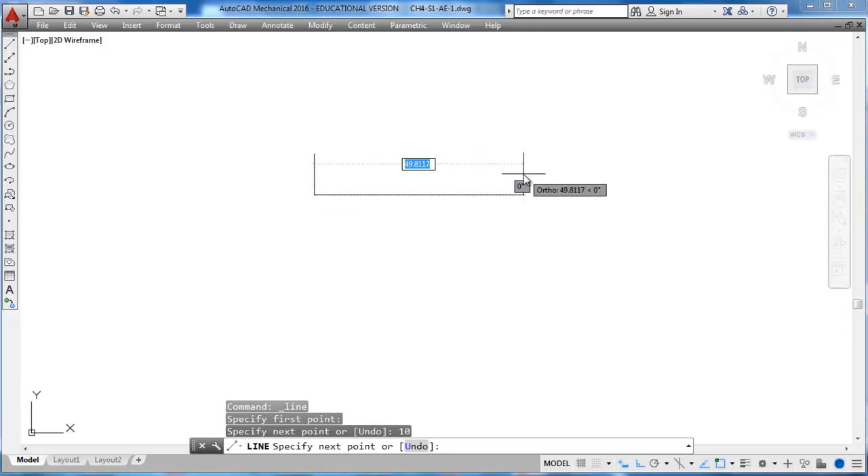So we'll start with line. Draw a rectangle of 10. Enter. 10 by 50. So that is the base.

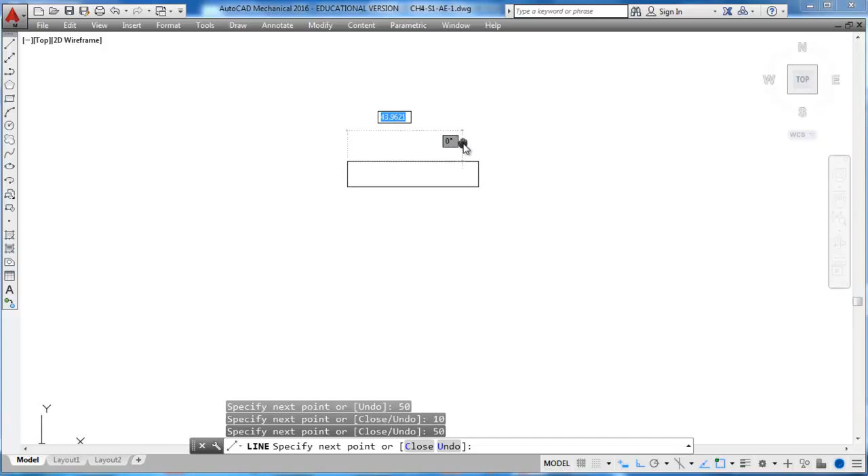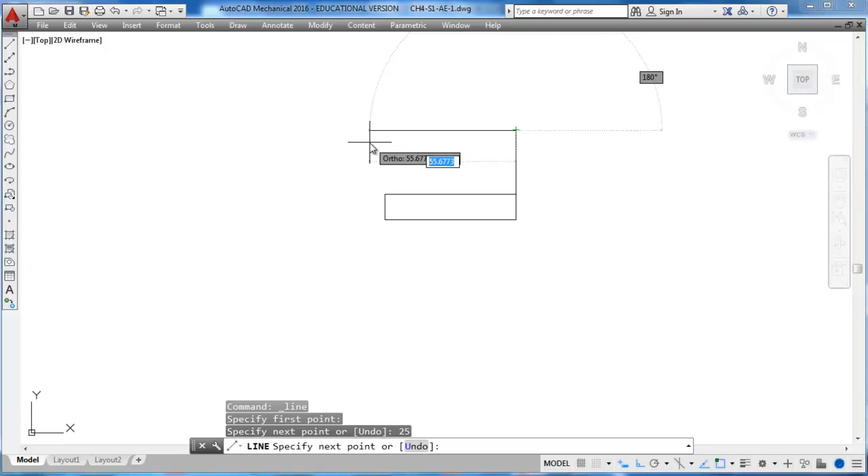Then above that we have to draw the rectangle of 25 by 75. By 75, 25 and to the end of this line. So that is the rectangle.

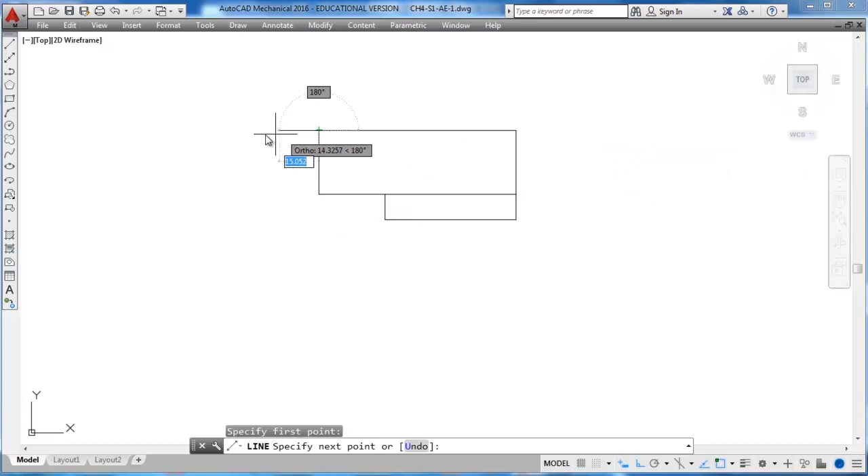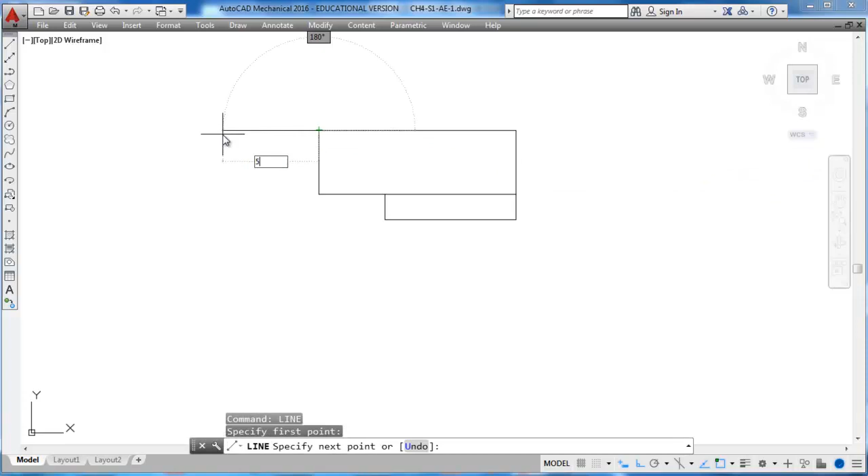Next we have to draw another rectangle of 25 by 50. 50, 25 and close it. So that's it. And here

there are two vertical edges here, one vertical edge here and another vertical edge here at this corner. They are at a distance of 50 minus 37, that is 13 millimeters from this end, and they are not visible. So we have to draw a vertical line which is hidden.

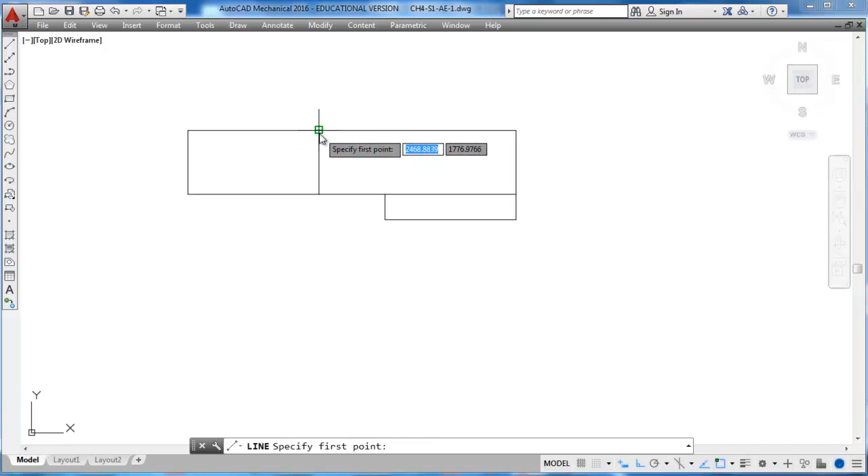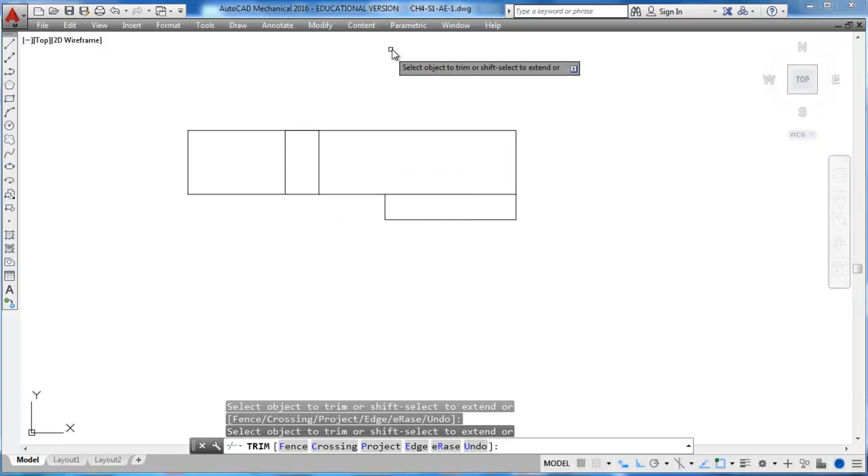So line from here 13 millimeters to the left, and then a vertical line, trim this portion, and this line must be a hidden line. So a hidden line. So that completes the front view.

Now we have to draw the top view. In the top view, we'll be able to see this top surface completely as one surface, and adjacent to that we'll be able to see the base, top surface of the base, half on this side and half on this side.

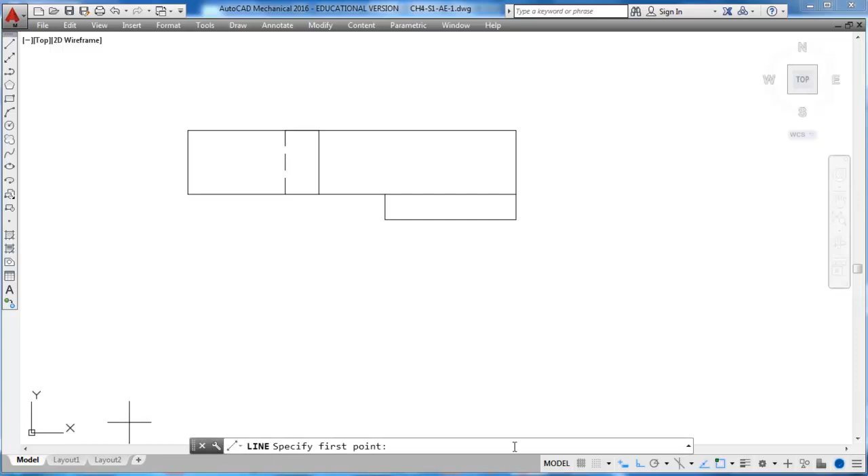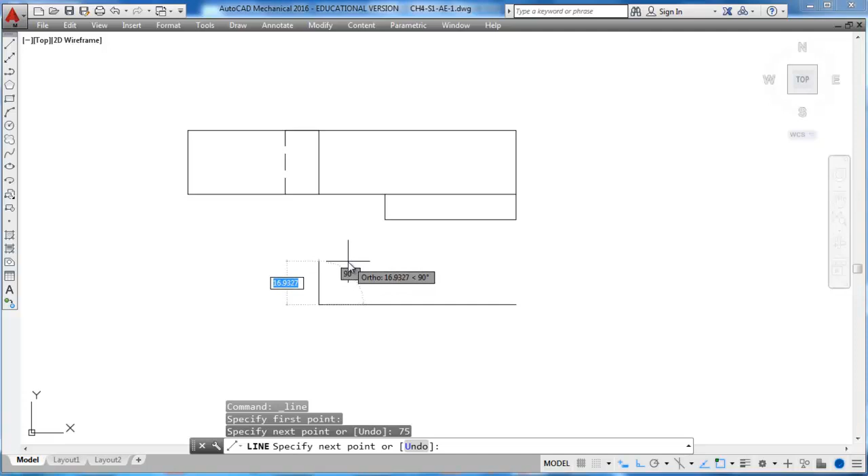16.5. Enter, and you should go all the way 50 millimeters and come down by 45 minus 25, that is 20, and half of that is 10 millimeters, and here you must come by 37 millimeters.

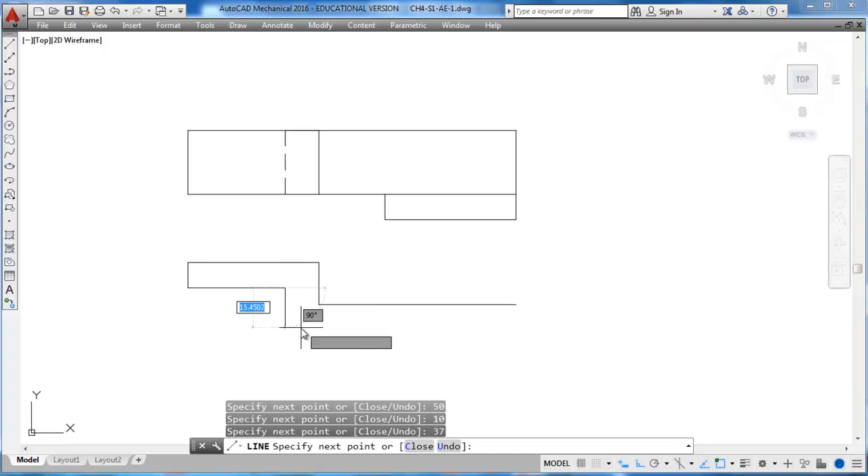Enter, and then come down by 25 millimeters, go up to the left by 37 millimeters, and then by 10 millimeters, this length by 50 millimeters, okay, and then 16.5 millimeters, 16.5 millimeters, and length of 75 millimeters, and then close it. So that is the top surface of that fork-like structure.

Then by the side of this, on this side and on this side, you must draw the base, and that will be 75 minus 12, that is 63. 63, half of that will be 31.5 on either side. So 31.5, 31.5, enter,

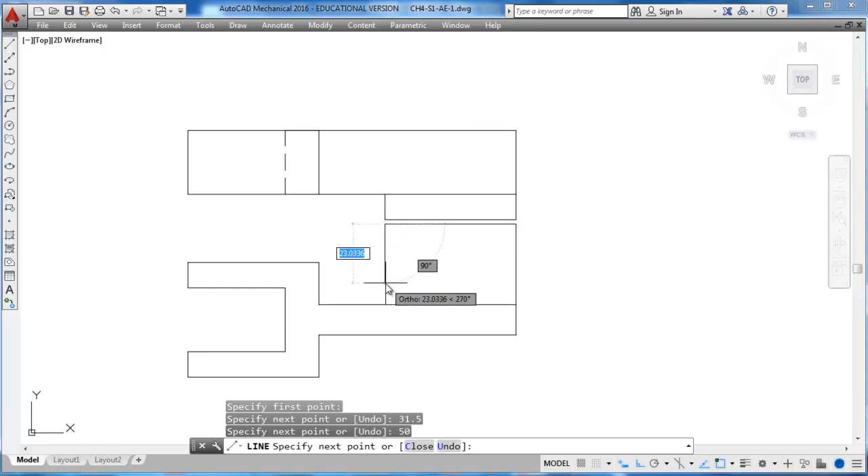and this is 50 millimeters. Close on this and start from here, and this will be 31.5, enter. This distance is 50 millimeters, enter, and close on this.

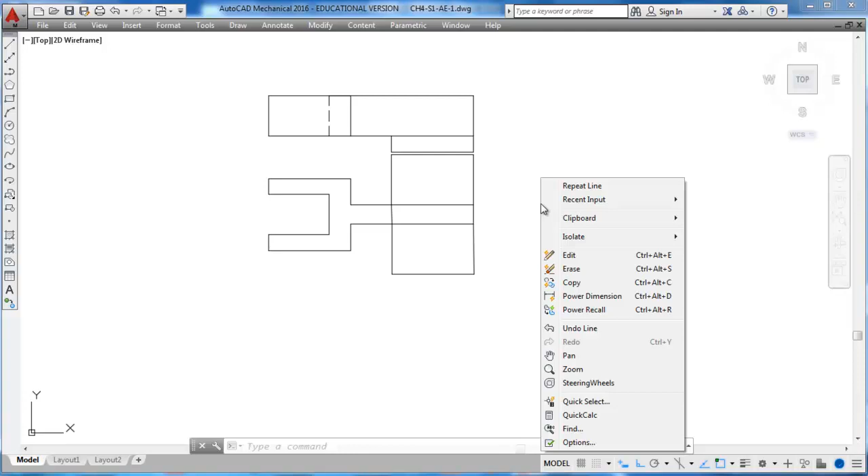Okay, now it is getting very close here. I can move it very easily, but you have to be careful when you start the top view. So best thing is to draw this rectangle first and then draw this later. And there is one unnecessary line here, we have to trim that. Select this and delete it.

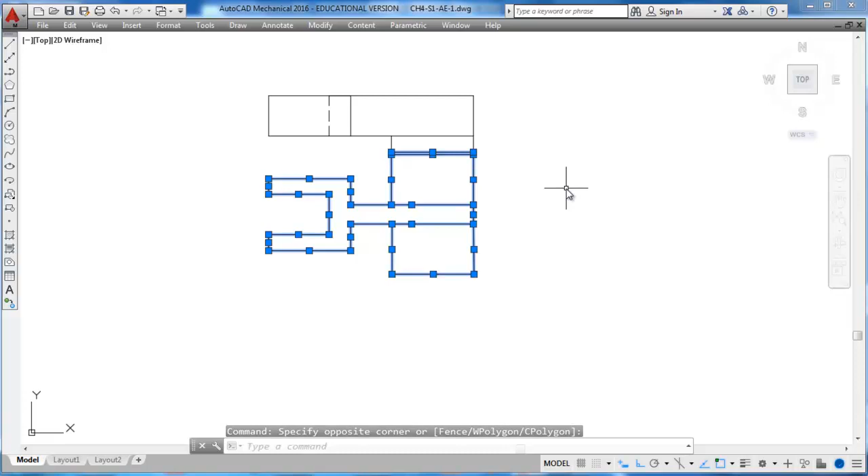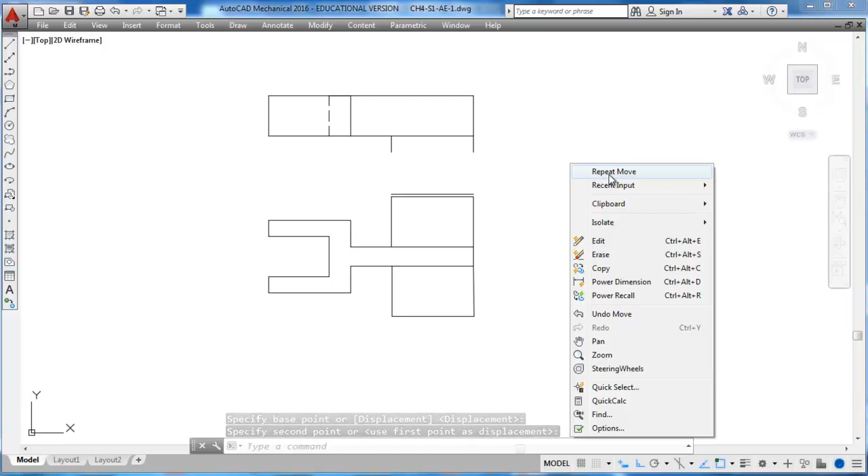Okay, and then this one. Okay, I will modify, move, base point and some distance here. Okay, escape. This line has been moved, we'll put it back. Correct it. So this is front view and this is top view.

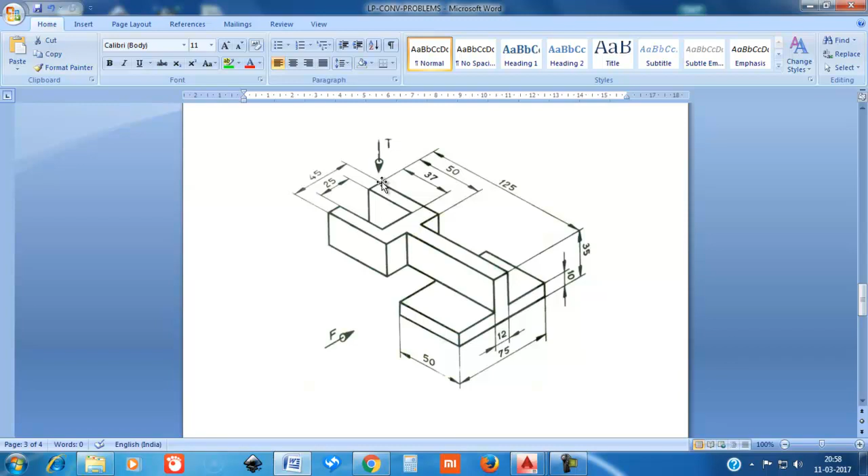Now we'll draw the right side view. In the right side view we are able to see this inverted T, and by the side of that we are able to see this rectangle and this rectangle here, and these hidden lines will not be visible. Okay, they are at a distance of 10 millimeters on either side. Okay, so

first we draw the base, which is 75 by 10. Line.

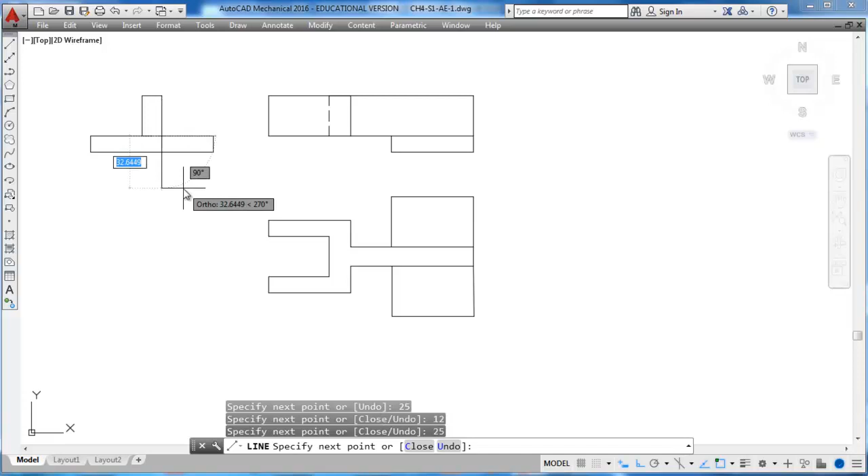Now we have to draw 12 by 25. Okay, draw the midpoint of this, 6 millimeters. Enter. Go up by 25 millimeters, to the left by 12 millimeters, and down by 25 millimeters. So that is the inverted T, and then

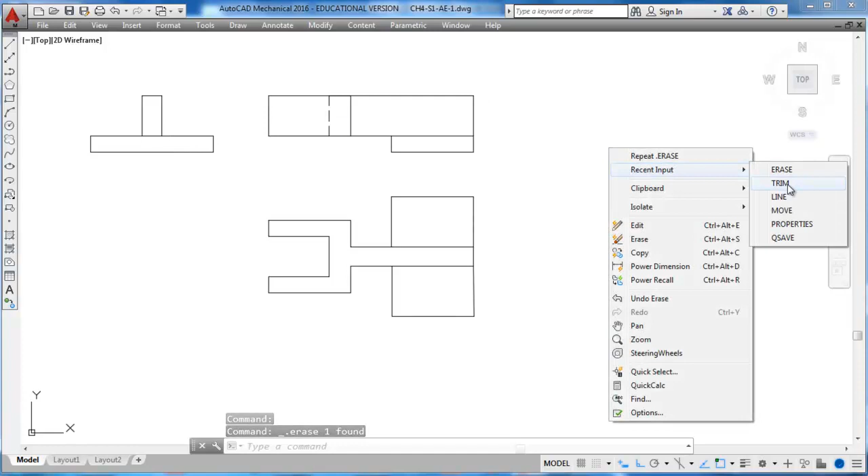trim, escape, remove this line, then go to trim, select all, trim this portion, that is inverted T. Now we have to draw those two rectangles by the side of this upper portion of T. The dimensions will be 45, 22 and a half, 22 and a half from the center.

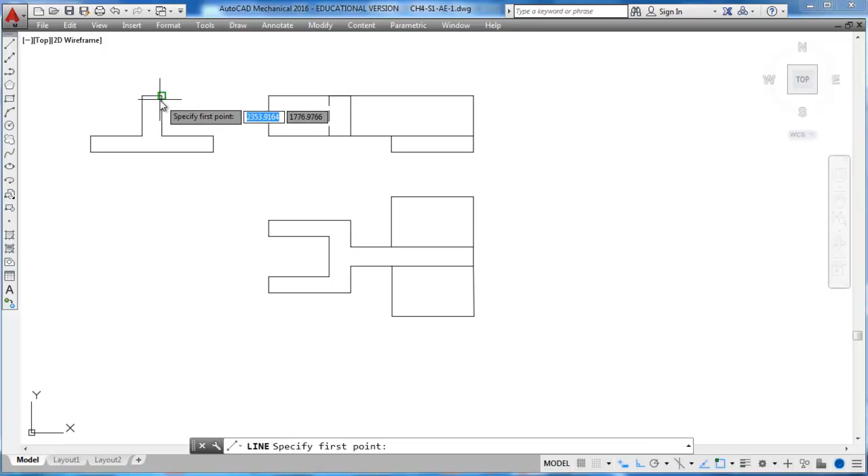Okay, so from the center to 22 and a half, 22.5, enter, come down by 25. Go to this by 45 and go up by 25 and to the back here. So that is the two rectangles, this and this on either side.

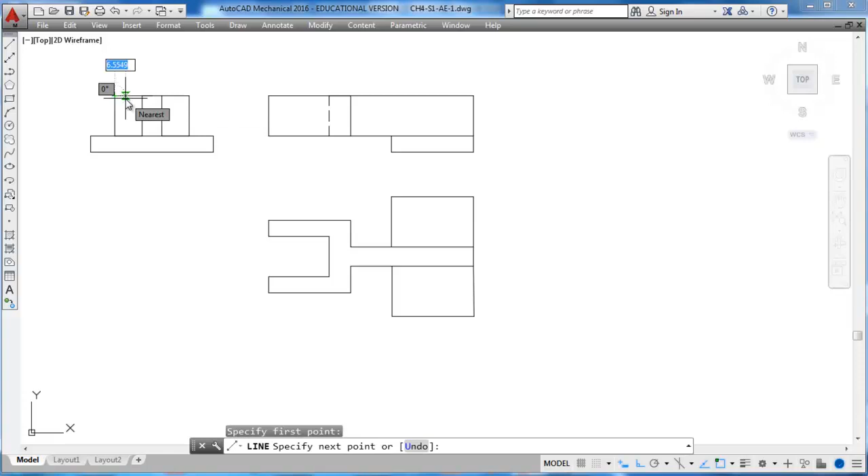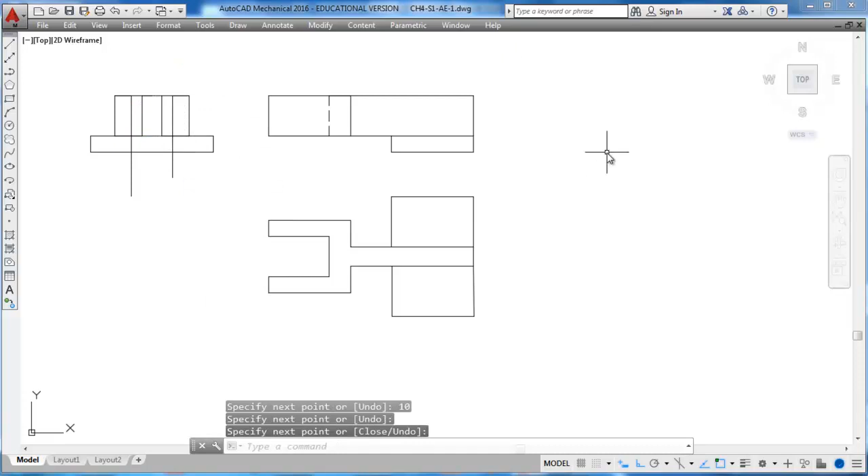Now we have to mark those hidden edges there. So line from this will come to the right by 10 millimeters and then come down here. You just draw a long line and it can be trimmed. Again repeat line from this end to the left by 10 millimeters and then come down. Then it can be trimmed.

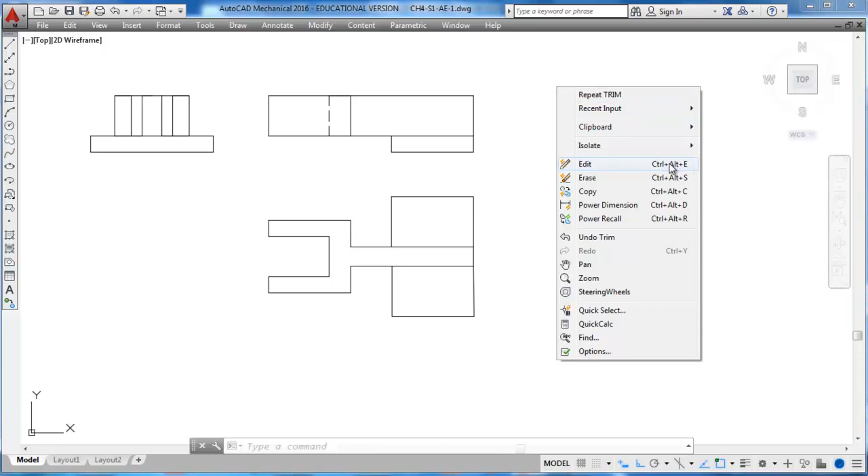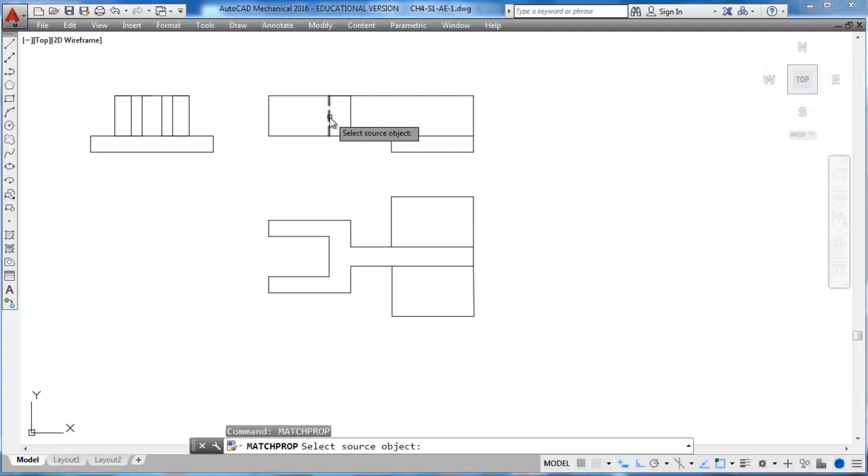Trim this and trim this, trim this and trim this, and make these two lines dotted. So for that, okay, escape, match properties of this to this line and to this line, enter, undo, it is wrong. Okay, recent inputs, match properties of this to this line and to this line. So that completes the drawing.

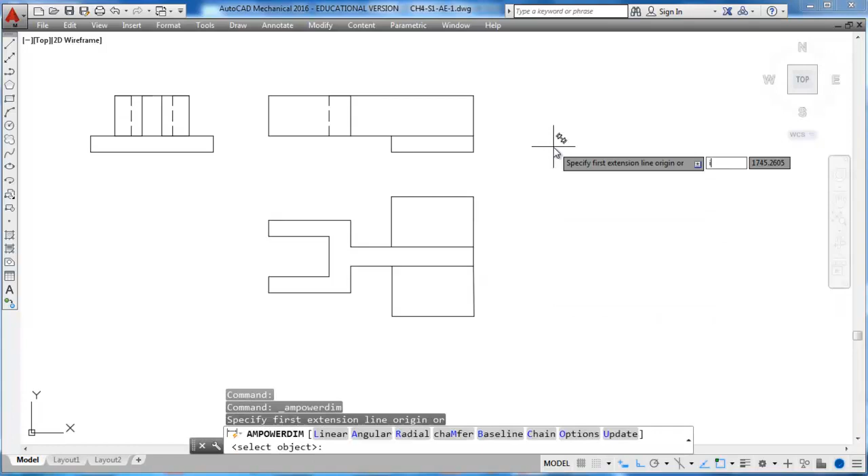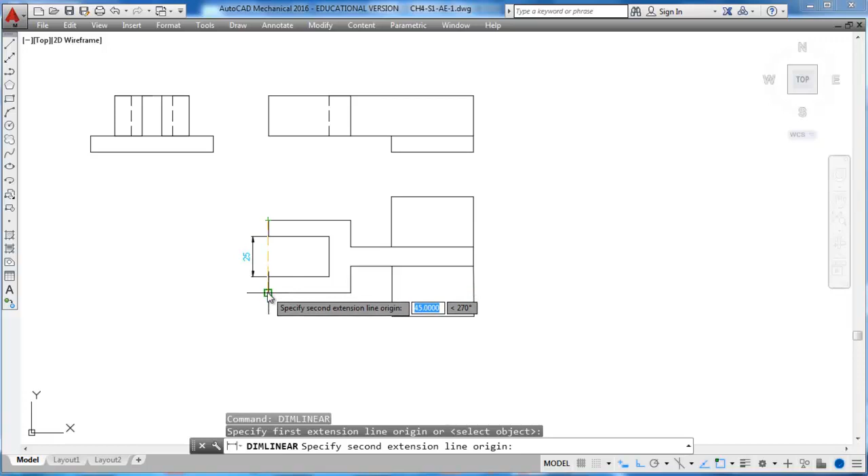Now we have to write dimensions. For writing dimensions, we write dim linear between this point and this point, 25, between this point and this point it is 45,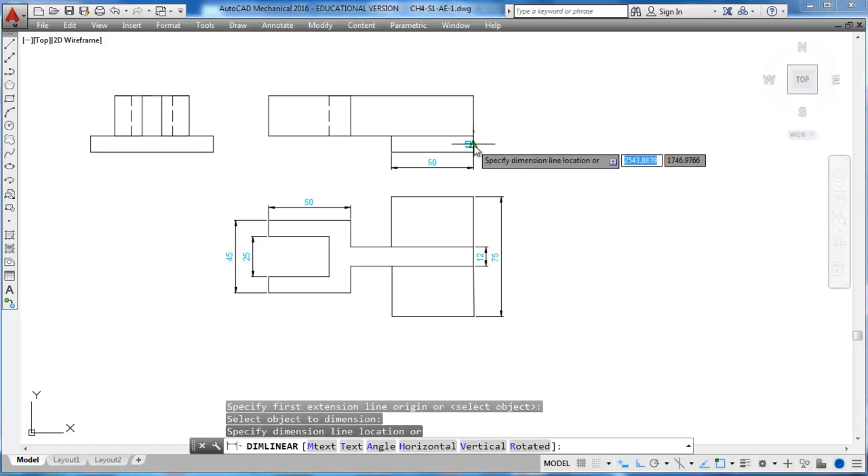and this dimension we have to give. Okay, that we have to give. 37 millimeters given. This is also given. Width is given. All the dimensions are written: 37, 25, 12, 75, 10 is written, 36 is written. So like that you must check all the dimensions whether they are written or not.

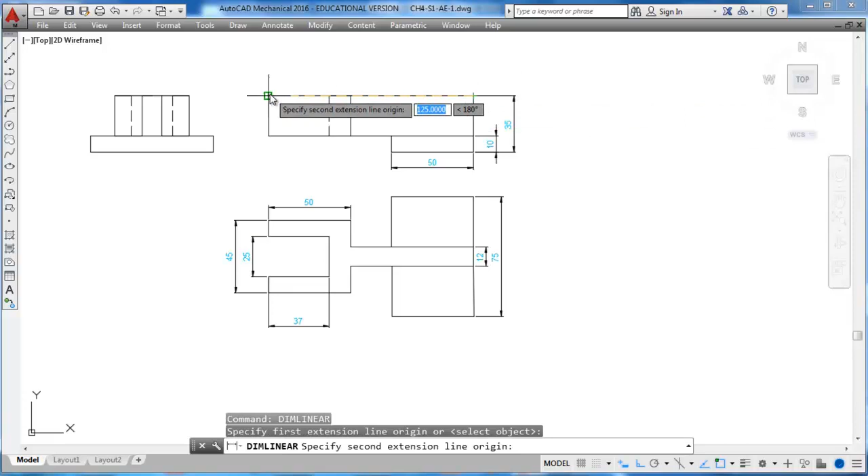Okay, total dimension, overall dimension 125 we have to write. So that we will write in the top view there, and the front view, write dimension from this end to this end, it is 125. Okay, escape. Now we have to assign weight, line weight.

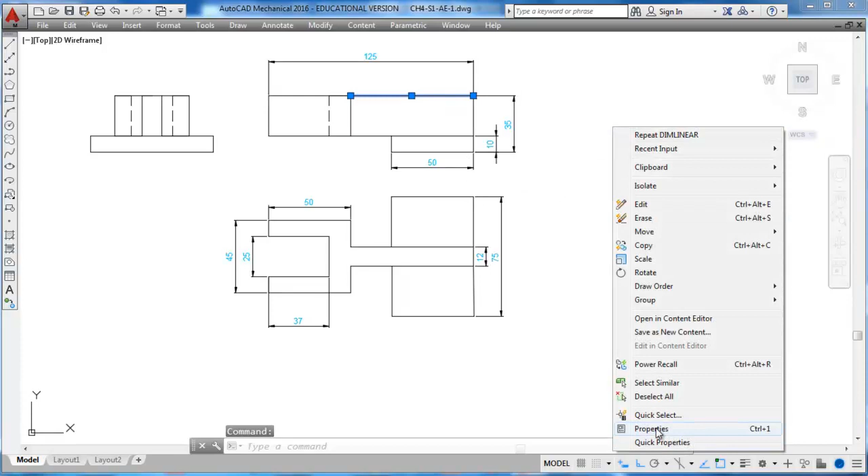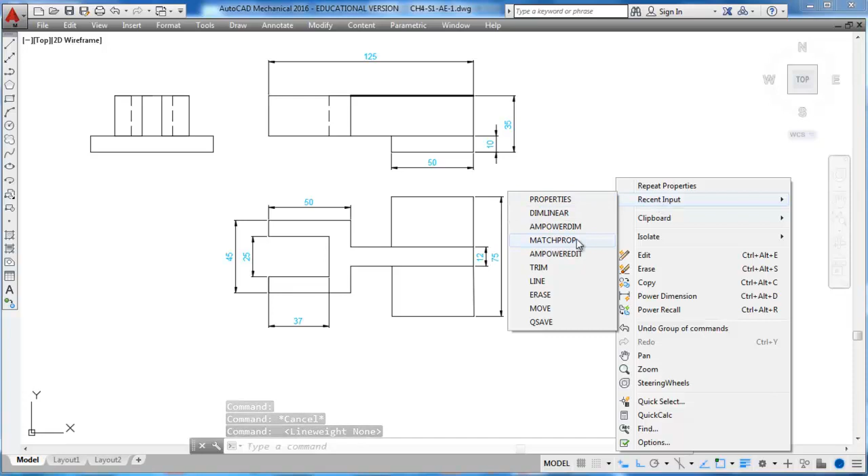So select one line, properties, line weight, make it 0.5, close this, show line weight, recent input, match properties of this to this, to this, to this, to this, to this.

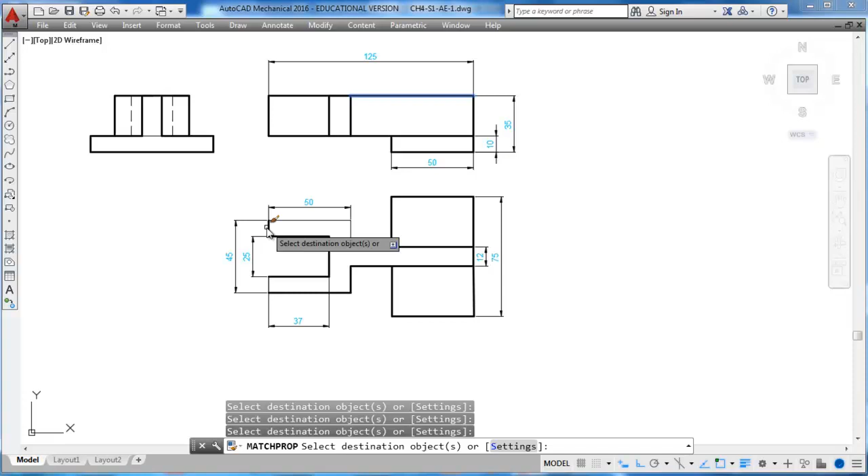What happened? We'll remove this dimension first, then match its properties of this to this, and then write the dimension. Recent input, dim linear, linear between this point and this point, write dimension.

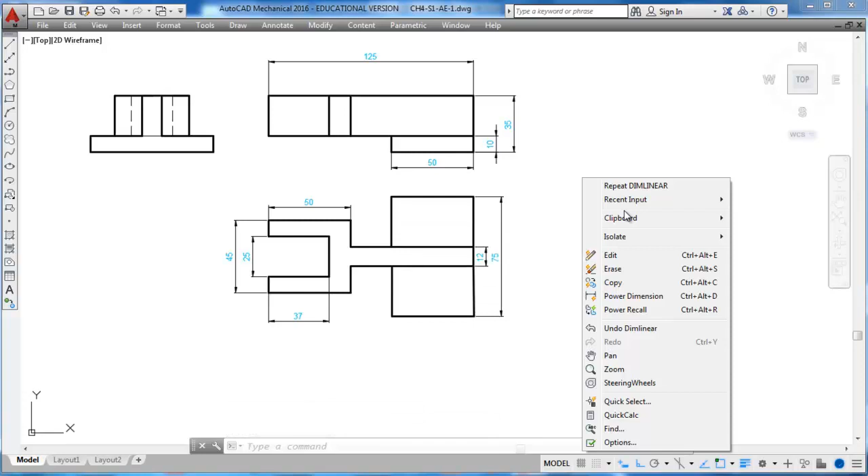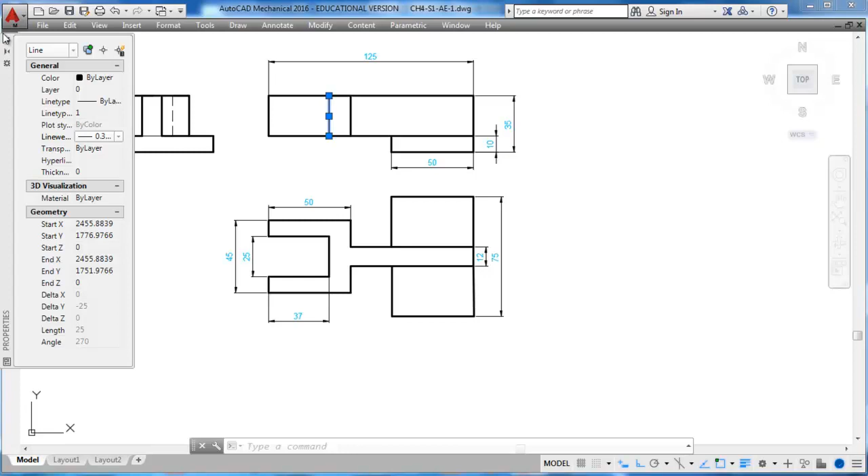Okay, note that when we assign line weight to this line, it is no more looking like a dashed line. So we'll select that, make its properties a little lighter so that it looks like a dashed line. We'll make it some 0.3, okay, and then close it, escape. Still it is not.

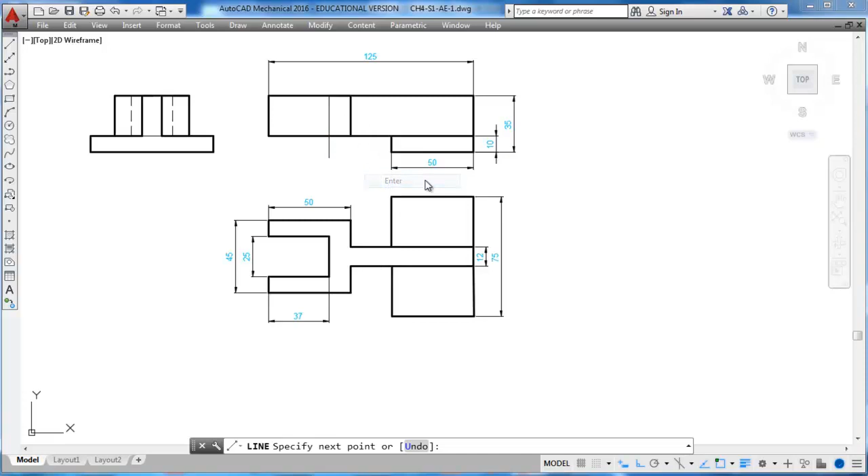Delete line, keep it thin. Okay, so that completes the drawing.

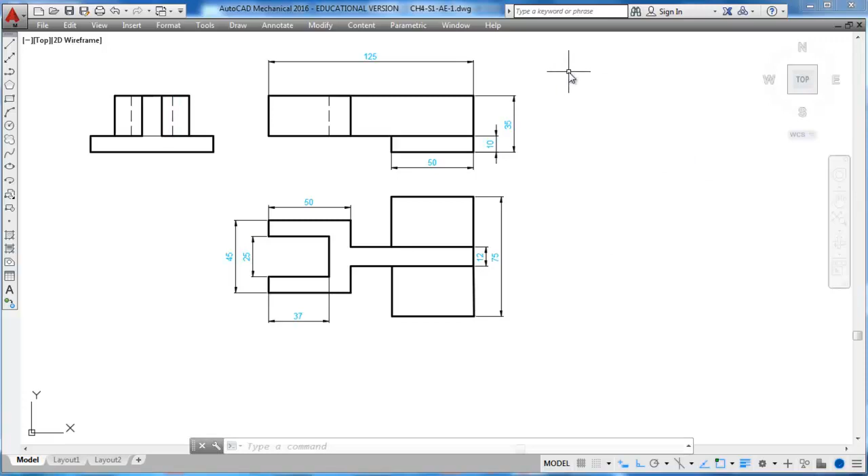Notice that there is one edge which is not visible in the top view as well as in the side view. That is the small portion of this edge which is below this vertical structure. So we have to mark it with dashed lines from the end of this to the end of this line, and also from the end of this line to the end of this line, and match its properties to this, to this, and to this.

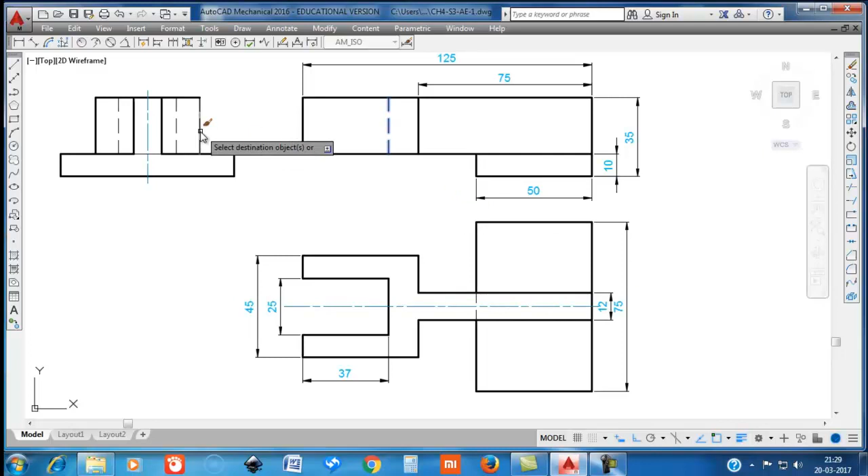Also, because this object is symmetrical about this vertical plane, draw a center line in the top view and also a center line in the side view as shown.